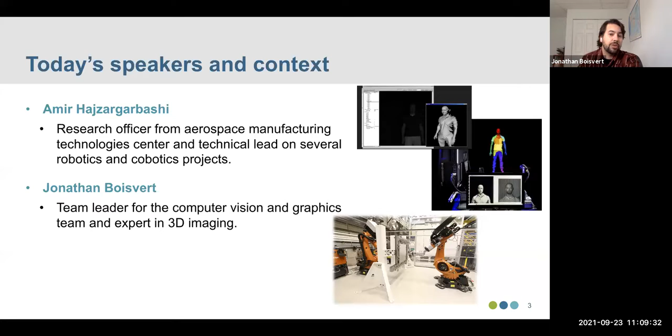And it also informs that we're here today with two different viewpoints on cobotics, and I hope that's going to be helpful.

All right, let's dive into really the subject matter of the day. So cobotics, what is it? For those who did not guess it, the term cobots comes from the contraction of collaborative robots. There's not much more to say about that—I'm sure we could discuss etymology more if we wanted, but let's not lose time.

So cobots have, in the last few years, become a very trendy topic. It received a lot of attention. To me, that's the threshold between a niche science and technology topic that really interests engineers and researchers, and what's more mainstream—everybody's got a different threshold. But to me, once it reached The Economist, that's when, in my mind, it starts to be important to communicate to a broader audience about what it is and what it is not, because there's a lot of potential, and there's also a few misconceptions.

So physically, in practice, what are cobots? They're nothing special—they're made of building blocks from the mechatronics field, so either robotic arms or mobile platforms, usually combined with sensors. Typically you'll have a few sensors on the robot itself, and also for most industrial applications, you'll want sensors placed in the environment or the work cell to sense what's going on.

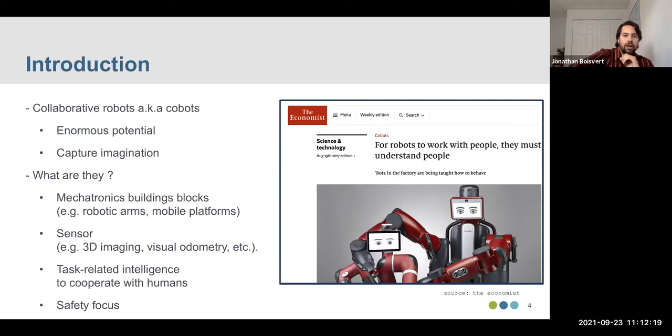All right, here I have a few selected applications that are of great interest in the research community. So I'll share that with you. Let's start with the first one here. So here is one of the most interesting uses that is very practical for industrial application.

It's collaborative assembly. In a case like that, you have a robot that provides components to a qualified technician that needs to assemble something. The robot has to provide the different components at the right time and select the right components for the right product being built. So there is quite a lot of intelligence that can be built into that process, but it's one way that a cobot can be tremendously useful. I'll pause this one.

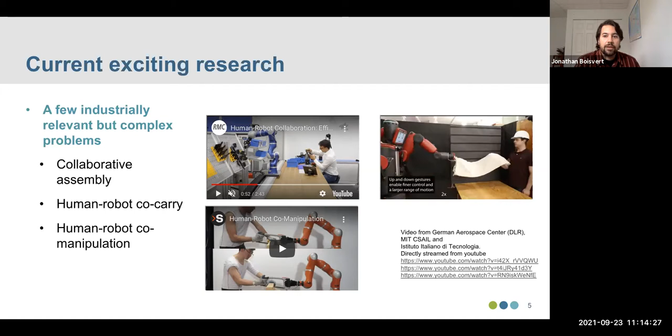So next, we have another application of cobots called co-carry. One thing cobots could do to be useful in an industrial setting is to share the load of an effort being made by a worker. In this example, the demo object seems quite light, so the worker isn't in grave peril, but nothing prevents the load from being much bigger, helping a worker carry loads that are heavy or awkward, with a lot of adaptability. In this case, there are even EMG sensors that trigger on muscle activity, so there's a feedback mechanism customized to the worker.

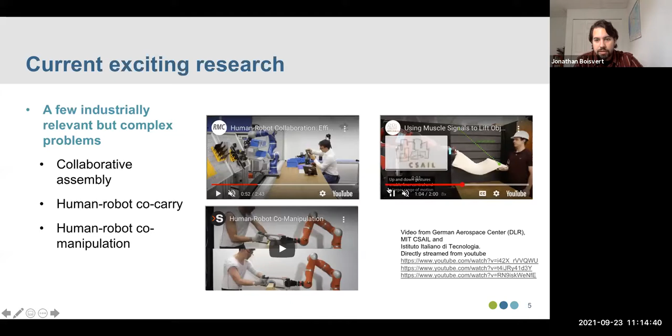A last example is what we call co-manipulation. Here you have a task that seems a bit difficult for the worker, but the robot can help take some of the load and progressively learn what the task is and how to do it with the guidance of the human. Progressively, the human has to provide less and less energy or effort. It's a great way to reduce potential repetitive strain injuries, or just to gain productivity in general. So in these three cases, I think those are nice ways cobots can be used that are good for everyone's imagination in long-term thinking.

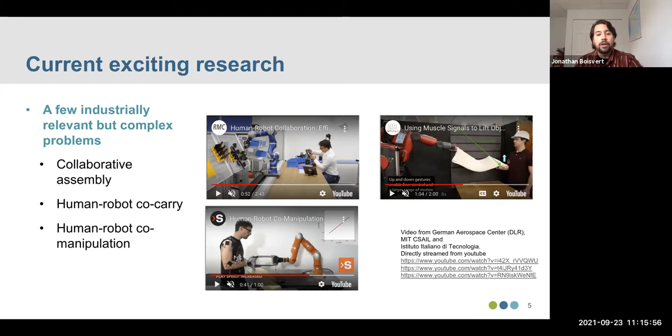However, the way the interaction between the human and the robot is done is quite complex. These are very exciting for academia, but there are other applications where you can deploy cobots with simpler interaction patterns, and in which it makes a lot of business sense to do that in today's factories or shop floors.

Here there are 7 applications. I'm not going to go into as much detail, otherwise it would take too much time, but let me just mention, for instance, machine tending - that would be this example here. It's a very simple way to use cobots, one that takes advantage of their nature, where you have torque sensors and other features that make them safer. So you don't necessarily have to lock them behind cages like you would with other robots, which saves a lot of footprint in your assembly line.

Collaborative assembly - we've seen an example on the last slide that was quite complicated. You can already deploy scenarios that look a bit like that, some less complicated, but again, the idea is to have the robot help in the assembly of something where the human still needs to be in the loop.

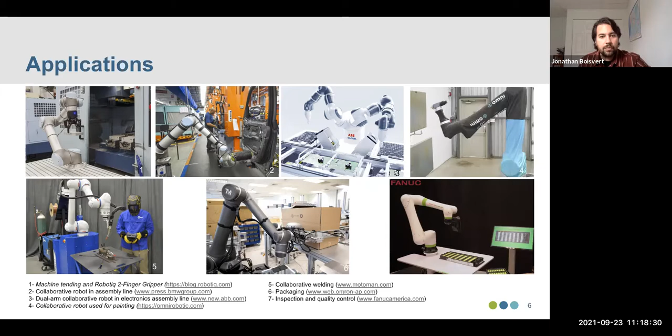So if we summarize a few of the opportunities and challenges: cobots are relatively cheap compared to other industrial robots. As I said, the footprint can be quite small. You don't have to lock them behind cages in most cases, which makes deployment easier. They're generally considered safe - that's quite a defensive way to say it, but as I said in the introduction, they can be safe, and if you use them well, they are.

One nice thing about cobots is because they enhance humans, they enhance what workers are doing, and they maintain the engagement of the workers. Their social acceptability is usually high - people are quite interested to work with cobots. In a lot of cases, people not only accept to work with those, but actively want to engage with cobots, especially workers at a certain age in their career who really want to learn new tools.

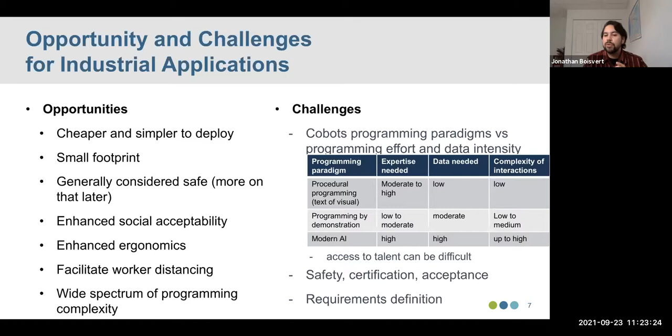Right now we're in a great space where there are a lot of products that are commercially available for cobotics applications. I'm not going to list every one of those, it would be silly and take way more time than what we have available today. But there's a nice inventory on Cobotics World that might be a good place to start if you want to browse through a few of the products.

What I can say for my labs, the labs that are close by in collaboration centers we have with universities, is we do have universal robots and also a Kinova arm in the labs where we develop applications. Although the Kinova is not technically marketed as a cobot, so you have to be very careful. But they have nice access to very low level control of the robot that makes academic applications and development quite easy. So in both cases, we've been quite happy.

Now I'm going to switch over to Amir. We're going to look at an application that we're just starting to tackle at the NRC, and because we're starting this initiative, all the questions you might have related to cobots, how to deploy it, how to structure the effort, we're going through that right now. So I'll let Amir talk to those points more in detail. The floor is yours.

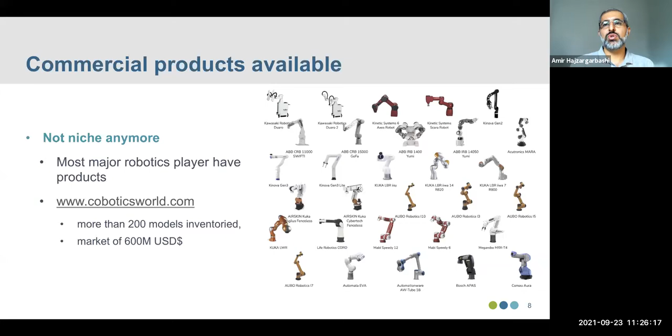Now we'll go to a recent project at the NRC. What you will see is part of a feasibility study of the project, or let's say a preliminary phase. The main project starts this month and lasts for 3 years, and we would like to address technical issues for a collaborative finishing process. As you know, in manual finishing processes we have lots of flexibility, fast setup at low cost, and visual inspection can be done by the operator. However, manual finishing operations are long, non-repeatable between different operators, and cause ergonomic disorders.

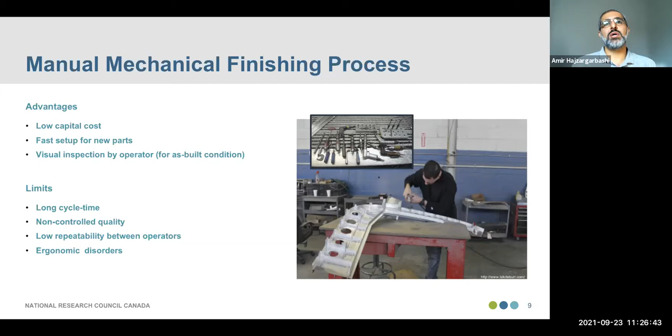The conventional automated finishing operations are faster with constant quality and reduce musculoskeletal disorders. However, they are costly and need a high level of effort to industrialize in terms of tools, programming, and characterization. They're also not very flexible when a part geometry has large variation, and therefore they require good quality control of input condition.

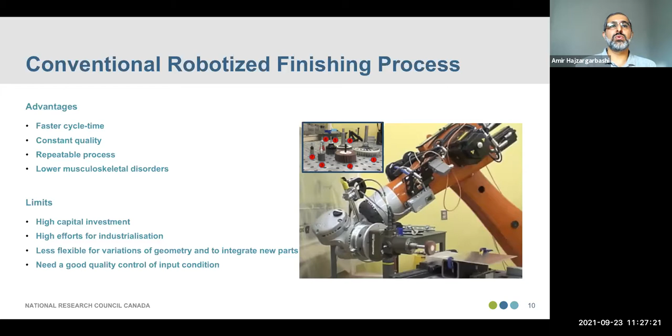Recently we see more commercial solutions for collaborative sanding and polishing, which are good for cycle time, quality, and reducing musculoskeletal disorders. But they are not yet ready for complex geometries, and they require offline or manual programming.

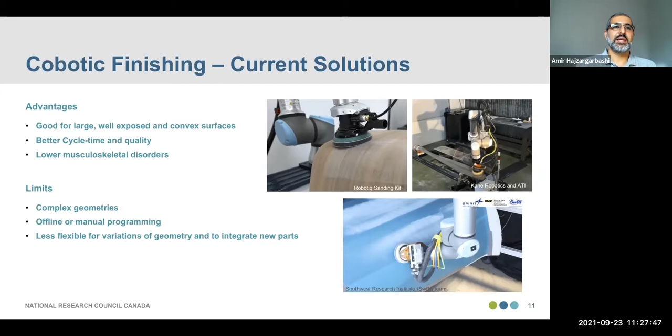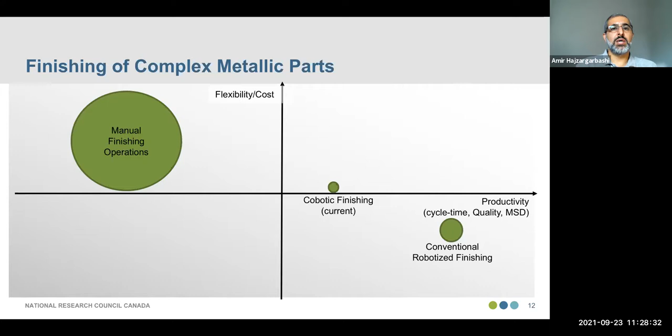In this quad chart, we position the finishing operations based on 2 criteria: productivity, which is the horizontal axis, and flexibility with respect to cost and capital investment, which is the vertical axis. We can see manual operations are low cost, more flexible, but less productive. In contrast, conventional robotized solutions are productive but not so flexible and are expensive. The existing cobotic solution is in between. We target the upper right corner to enable cobotics.

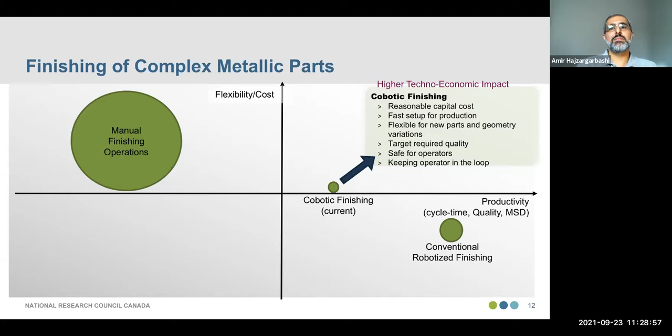To enable cobotic solutions with higher techno-economic impacts, to be more affordable, flexible for geometry variations, with a fast setup for new parts, and of course collaborative to keep the operator in the loop and benefit from his knowledge.

Within long discussions with our clients and partners, we developed our vision for a cyber-physical system integrated into a collaborative platform. A cyber-physical system, or CPS, is an intelligent system composed of many modules to interact with the robot and the operator, and to provide tools to make the operator's task easier.

In this CPS, we consider a digitization module. Even though nowadays we have the 3D model of a part, digitization with structured light is necessary to create the real 3D geometry of the part as it is built, with all variations and distortion.

We also need a module to manage the process parameters. Therefore, we create master charts, which are the result of process characterization, to suggest process parameters to the operator. In parallel, with artificial intelligence, we will learn from operators' feedback on the achieved quality, and later the CPS can suggest the best process parameters for a desired quality.

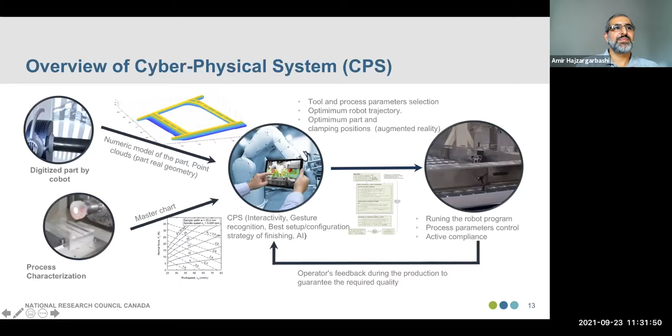Now let's look at the typical finishing process within this vision. I present an imaginary scenario with all the different modules of this platform, the CPS. Other scenarios or other ways to perform a finishing task can be imagined. This case is for a new part, which needs setups created from scratch. But once a part is already programmed, you can just load the same program and use it as many times as you want.

First, the operator interacts via touchscreen with digital twins — by this I mean the 3D model of the part and the digital mock-up of the platform. He selects some geometrical features and assigns finishing tasks and tools for those features. Using gesture recognition, the interactivity can also occur directly on the part. For example, the operator can divide a finishing task into two tasks or limit it to a portion of the surface by gesturing on the part.

To specify process parameters such as advance and downfeed, the operator can rely on his expertise or on master charts, which will be integrated into the CPS and are the result of process characterization. During this project, the CPS improves its intelligence via deep learning and can suggest the best process parameters for a desired quality — meaning neither over quality nor bad quality, because each of them has an extra cost.

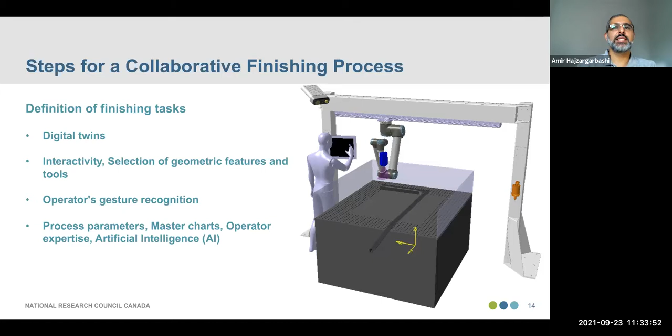Then the CPS generates the best finishing scenarios. We will develop optimization algorithms using the robot's redundancy to determine the best position of the part on the table and to reduce the number of setups.

In addition, the CPS plans work sequences and clamping if required. It creates optimum robot trajectories free of collision, and this way we eliminate or reduce the need for offline or manual programming.

The integrated scene supervision camera and augmented reality projector will help the operator position the part correctly on the table and clamp it. The goal here is to eliminate conformation jigs, which are expensive tools used to shape the part to its nominal geometry.

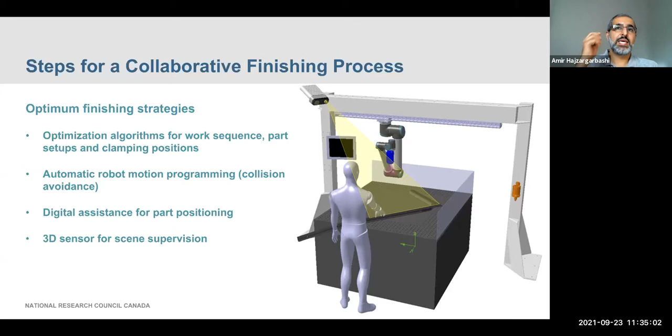The CPS will also be equipped with a structured light camera. Vision algorithms will be developed to scan complex parts with reflective geometries. The objective here is to have an affordable, precise, and fast system.

The scanning program is generated automatically by the CPS based on vision system requirements. At the end, the generated point cloud is treated to establish the real model of the part with all non-structured features. For example, for welding we can think about weld seams and weld spatters, and for machined parts, burrs, as well as deformation caused by clamping.

Now Jonathan will explain more about the vision system and its challenges. Thank you.

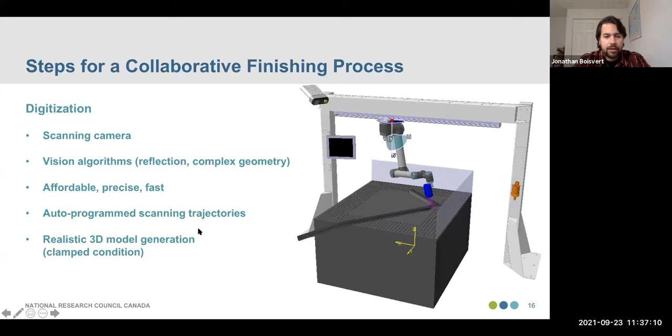One of the challenges we face in cobotics applications is how you use vision. In many industrial applications of cobotics, you have more than one level of 3D imaging in your application: the component itself that you want to inspect for quality, and also scene supervision where you want to infer what the worker is doing and enable some level of interaction. The most common type of sensor people know for interacting with humans are RGB-D cameras. I want to touch on that and open the box a little, giving you a sense of the major flavors of technology used, because it does inform your choice, and they all have different challenges.

RGB-D cameras provide you a color, RGB, and a depth for each pixel. They can measure depth in different ways. The most common are structured light, active stereo, and time of flight for this family of sensors.

Active stereo is a technology where you have two cameras that do synchronized captures, and there's a stereo matching process that matches a pixel from the right camera to a pixel in the left camera. By triangulation, you get 3D points. The active part usually means there's an additional projector in the unit, typically operating in the near infrared so a human wouldn't see it, projecting a pattern that looks semi-random to add texture to the scene. These are quite nice and relatively immune to motion artifacts because you have one synchronized capture.

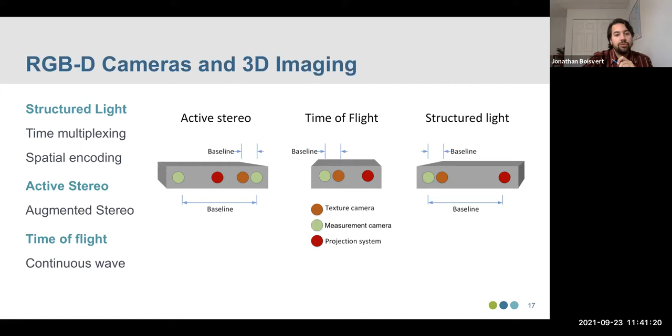To reiterate the most important things to keep in mind when designing your application: accuracy, resolution, and speed of capture are things you should look at, but that's the most evident one. Motion artifacts, even with enough frame rate, can manifest as wavy 3D structures or just noise in the capture. It's important to validate that you're okay with the type of artifacts you might see for a given application. If you have a robot that moves fast with a sensor on it, you might see a lot of motion and need to choose accordingly. On the other hand, if you want very high resolution and accuracy and you're okay with stopping, something like time-multiplexed structured light might work.

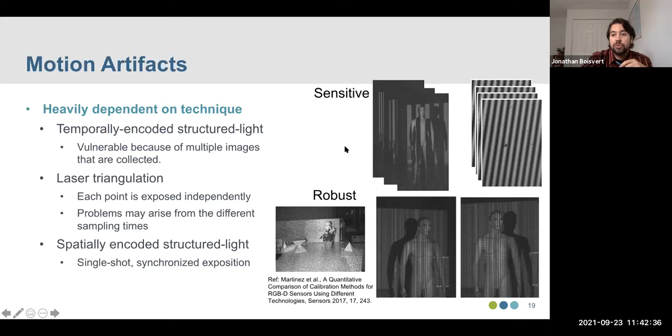Another type of problem you'll see with 3D imaging in industrial cobotics applications relates to multiple reflections. Most commercially available 3D sensors operate under the assumption that light comes from the sensor to the scene and back to the camera, with only one interaction with the scene. If you have multiple interactions - multiple reflections or subsurface penetration in a material - then this assumption is no longer valid and you'll see quite interesting behaviors. By interesting behaviors, I mean useless points.

But there are ways to go around that. Here, I'll do a little shameless plug - that's a method we've developed in my lab to compensate for multiple reflections and filter them out.

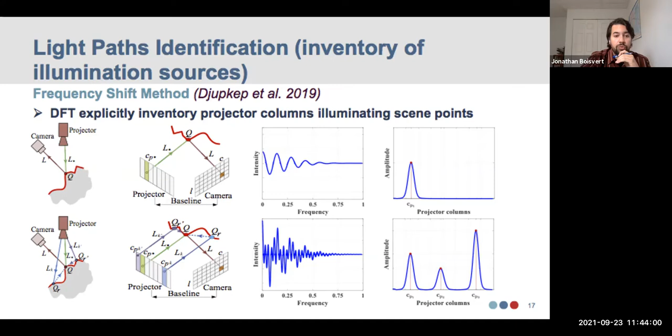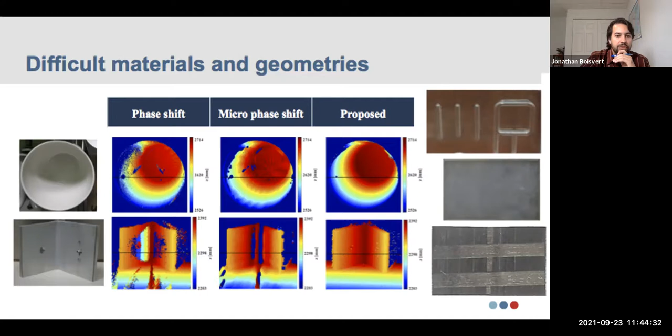So there are ways to make yourself less vulnerable, but it's very important to keep that in mind, especially because this typically happens in areas of high curvature and concavities, which is often where you see the most defects. So that's where you'd like to have more points and higher quality imaging to spot defects - all the more reason to be mindful when developing your application.

Last thing I want to say about 3D imaging - I've talked about some methods to do 3D imaging, the ones available in nice, well-packaged products right now. If you need high resolutions or very large objects, say deploying a cobotics application where you need to track robots across hundreds of meters, there are other sensors and ways this can happen. And if you need to look at defects at the nanometer scale, beyond the micron, there are ways to do it.

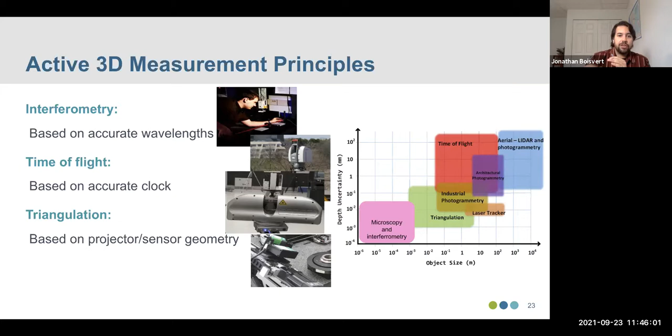All right, back to Amir. Thank you. Good, now back to the process.

By having a good, realistic 3D model, the cyberphysical system, in interaction with the operator, calculates the number of finishing passes. The operator can verify the robot trajectory in simulation, and if satisfactory, authorize execution of the finishing task. We know the real geometry, which helps calculate the number of finishing passes and helps the robot follow the real geometry. But it's not practical to adapt to every small deviation in geometry, since the robot can't react very fast. So it's common in robotized finishing operations to use a compliance head.

Currently our platform is equipped with commercially available radial and axial passive compliance heads. Each head provides compliance or compensation in one direction by applying a constant force to the part. During this project, we developed an active compliance head that is modulable and programmable, and can provide or block compliance in different directions. This way, we won't need to change the head for different applications - we can use the same head we develop for all applications.

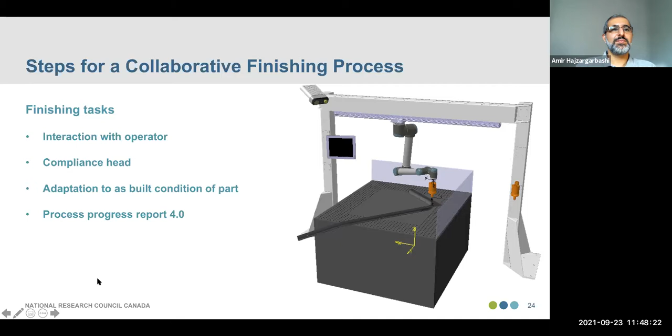Once the finishing tasks are completed, the operator inspects surface quality and gives feedback to the CPS using a touch screen or gesture recognition. Jonathan's research team is working to use the structured light camera for quality measurement, giving us an automated and more repeatable way to measure surface quality. The results can be projected onto the corresponding surfaces for the operator to accept, reject, or launch extra finishing passes.

Data concerning surface quality, tool and process parameters, and robot trajectories are all gathered, saved, and used to train a neural network. This allows us to capture the operator's knowledge and learn from different platform experiences, so later the system can help less experienced operators define and perform good quality finishing tasks.

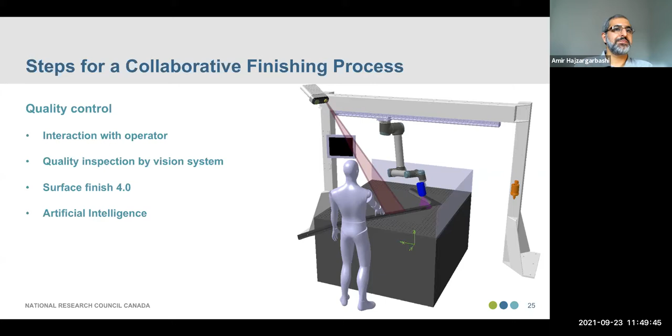From the process side, we also evaluate some process hazards, and we've put in a downdraft table and a scrubber behind the platform to collect dust from finishing operations. By the way, we have not yet done a risk assessment - that is coming very soon.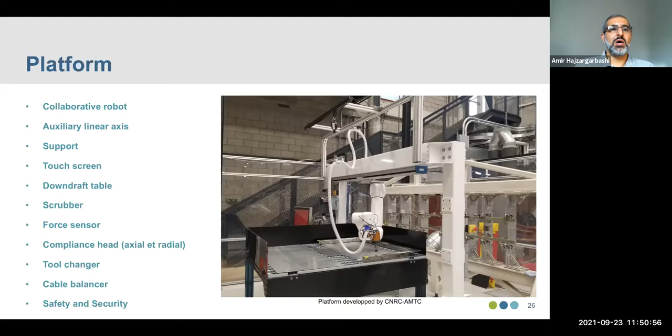Okay, talking about safety. These types of robots are designed to ease the collaboration between robot and humans. Different people in an organization may think of this robot differently. Some think that they have to put it in a cage, otherwise they are useless. And some think since they are collaborative, there is no need for any safety consideration.

The fact that a robot is a collaborative one doesn't mean that the whole cell or the operation is safe for humans. We have ISO standards, ISO 10218. Part 1 covers the requirements for manufacturers of industrial robots, and please note that the cobot is also considered an industrial robot. Part 2 of ISO focuses more on integration and installation of the robot and all attached systems.

We also have a Canadian standard, Z434, which is equivalent to ISO 10218. And there are some technical specifications or technical reports which are not yet part of the standard, but will become standards sooner or later. We have on the ISO side 15066, and on the ANSI side, RIA, which is Robotic Industries Association, technical report 15606, that describes more collaborative operations. But keep in mind that this technical specification is in support of ISO 10218. It means you have to interpret them along with the ISO standards.

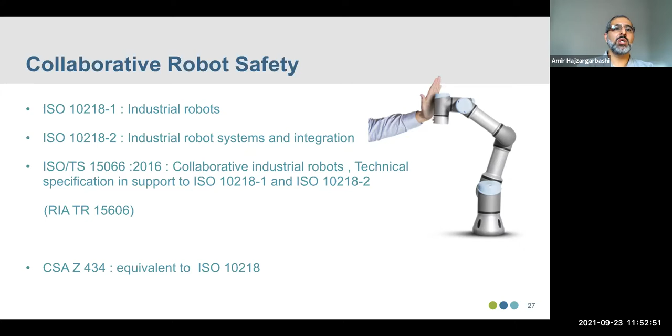Now, please, next. In a collaborative application, we may face hazards between the application and the environment, the end effector and the tool, and other systems and machines. Therefore, each case is unique, and we shall do a risk assessment for each item to identify hazards and eliminate them. Each risk must be evaluated based on its severity, exposure, and avoidance to establish a risk level.

That is what you see in table 2. And as a function of risk level, in table 4, you can see risk reduction measures, or many risk reduction measures, that must be considered. For example, if we have a high risk level, we absolutely have to consider reduction measures from elimination to safeguarding.

In most cases, there are integrators who realize robotic applications, thus they shall perform a risk assessment. But nowadays, we can see end users buying collaborative robots to implement them in different situations, since they are simple to use and set up. Therefore, in this situation, the responsibility is on the end user to perform the risk assessment.

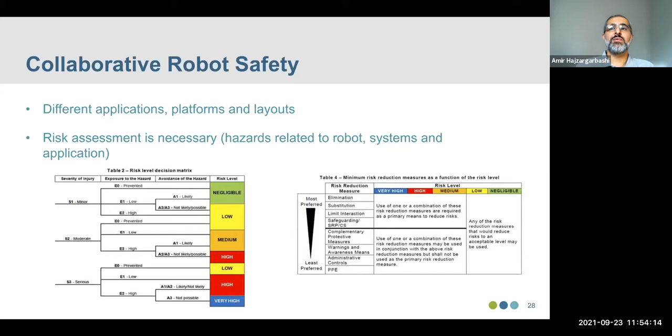Next, please. There are four different types of collaborative operations, such as safety-rated monitored stop, hand guiding, and speed and separation monitoring. These three can be used with big industrial robots. Collaborative robots themselves are originally designed with power and force limiting, which is the fourth type of collaborative operation. A cobotic platform, which has end effector tools or other systems, can use a mix of all these collaboration types.

Now, bear in mind, when the operator is inside the cell, contacts that could be quasi-static or transient could happen either intentionally or unintentionally. But the force or pressure, whichever is more critical, must be limited to avoid any harm to the operator. And this is true not only for robots, but also for the end effector, the tool, and the parts if it is moving. In the right figure, you can see the force and pressure limits in transient and quasi-static contacts.

These limits for each body region, and we have a total of 29 defined regions, are different and are listed in the technical report. The technical report also specifies that no contact is allowed with the head and neck. Therefore, the robot program must avoid those regions. The contact pressure and force must be evaluated for each case of contact, and if not respecting the limit, corrective action must be considered to alleviate the risk.

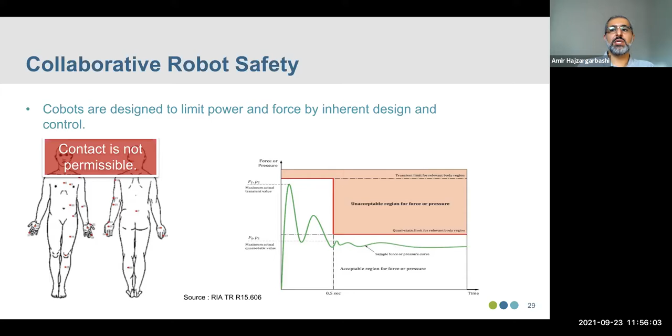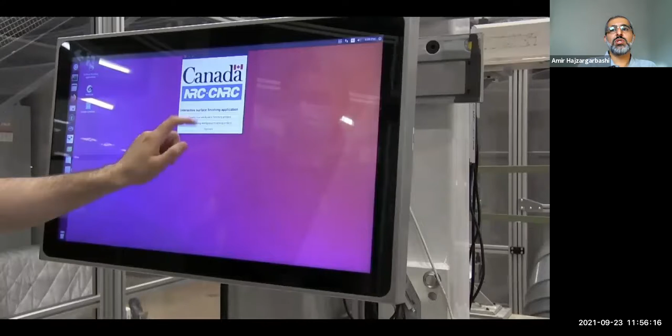Next, please. Now we watch together a demonstrative video, which is the result of the feasibility phase of this project. For the time being, there is no vision system, and the interface and the cyberphysical system will be improved and modified during the 3 years of the project.

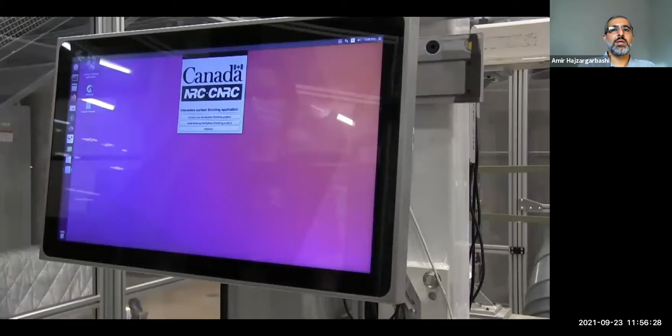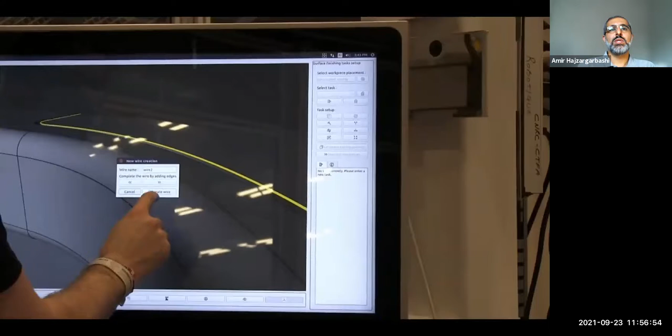You see here that we load the platform, and it takes a little bit of time. Then we select features interactively with the touch screen. We define a task, we're going to find all tangent curves. We define a task with a tool associated.

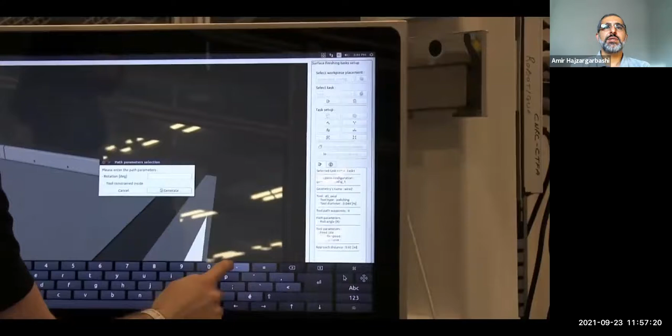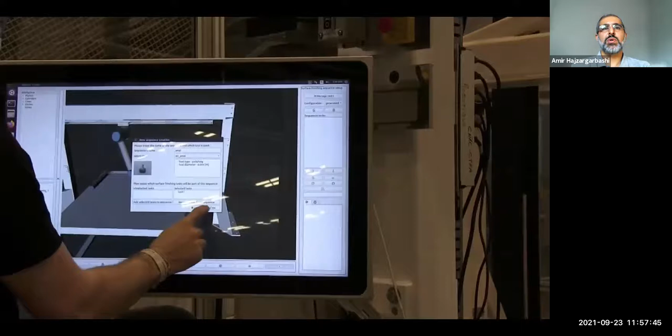And we define some parameters. Then we generate toolpath, and generate task. Generate a sequence, and then generate the program. The program we can see in simulation, and we can see also the joint variation during the trajectory. Since we don't have much time, we can go to the next one.

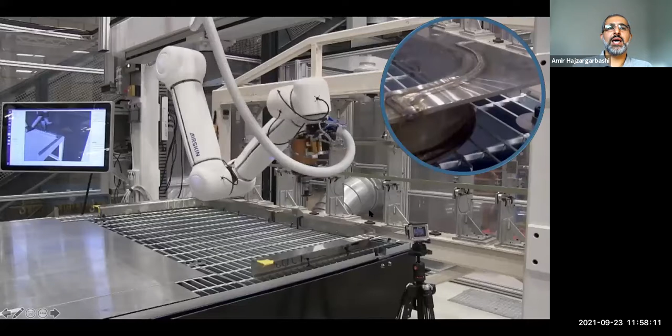And here you see the grinding task that was defined within the CPS, which is executed synchronized with the CPS.

In the meantime that you're watching this video, as a conclusion note, thanks for being there and listening to us. I hope you enjoyed this webinar. We tried to give you an insight about collaborative robots, the current and future applications, the opportunities and challenges. We showcased our Cobotic project to illustrate the extension of collaborative applications to more demanding manufacturing processes, as well as interactivity, vision, and scene supervision.

The idea here is to use the best of a collaborative robot with the knowledge and expertise of an operator. As Jonathan mentioned, the NRC has many experts who can work together to solve your industrial problems. In this case, you can contact us and we'll be happy to talk to you. And at the end, I insist again on the importance of risk assessment when you use collaborative robots. Thank you all.